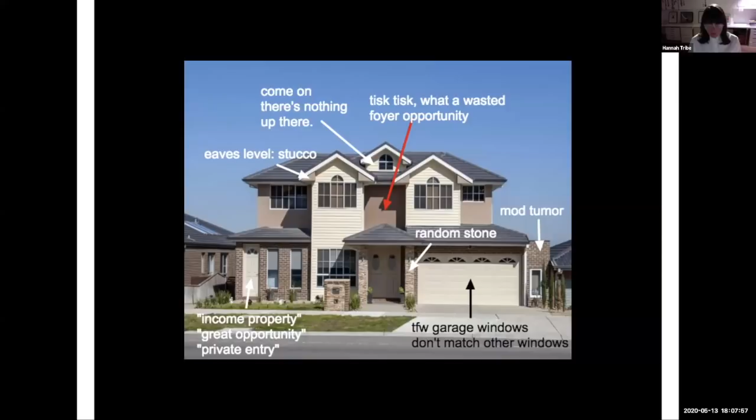My career began in a time with a very different spirit. I started working during the Sydney Olympics, when public spaces had a very different character to how they have now. It was boom time building, optimism, and there was an incredible triumph of public life over the private. We all went out rather than staying at home. And yet today, the end of this moment in my career is marked by the fires, by a raging and galloping climate crisis, and by COVID-19.

We want to help, we all want to do something to support the sick, to support the frontline workers. And the best way that we can do that is to stay at home and actually be domesticated. We've had to domesticate our work lives, we've domesticated school, we've domesticated the gym, we've domesticated our social lives. We're all cooking more, we're not flogging ourselves with additional activities and appointments, and we're able to do a load of washing in the middle of a workday.

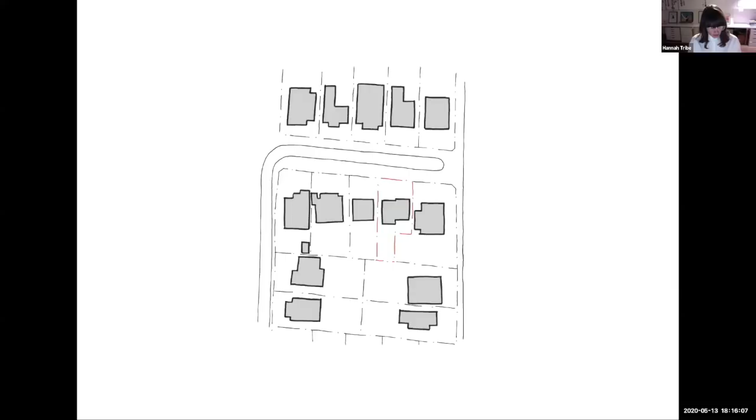The area is really characterized by these small bungalows sitting under a canopy of leaves. In order to keep that, we need to keep the height of the house low and also the footprint of the house small. Here's some shots from around the neighborhood.

This was the house we began with. Here it is on its funny site. We trimmed its back off to reduce its overall footprint and provide canopy for the trees. Here it was at the back of the house. There's where we sliced through the house, and here it is now.

So the back gable's treated as a kind of call and response to the front elevation, where we had the brick sunburst on the front. We've got the cheeky gables on the back. That's my call and response diagram.

Such that from the public domain, the house makes a contribution to this kind of suburban language of brick and tile roofs, but it still is unapologetically contemporary, and it gives you a kind of feeling of suburban uncanny.

So it's a subtle and polite urban design response, this house, not visible from the street elevation. From the rear elevation, it peeks through the other gables.

But what about the cultural response, or why is this interesting domestically? This is a house that actually celebrates our changing cultural values, our relationship with domestic work, our relationship with landscape and our leisure. At the same time, it's a celebration of the modesty, craftsmanship and public domain focus of the past.

Here's the back view. This is this idea about the relationship with the garden, and that garden's all completely overrun with our clients' beautiful homegrown vegetables now.

So the house presents its best face to the street. It's well crafted, it's whimsically detailed, it's expensive to build. But around the back again, here we see the unpoetic side. It houses the domestic work, the meal preparation, the washing.

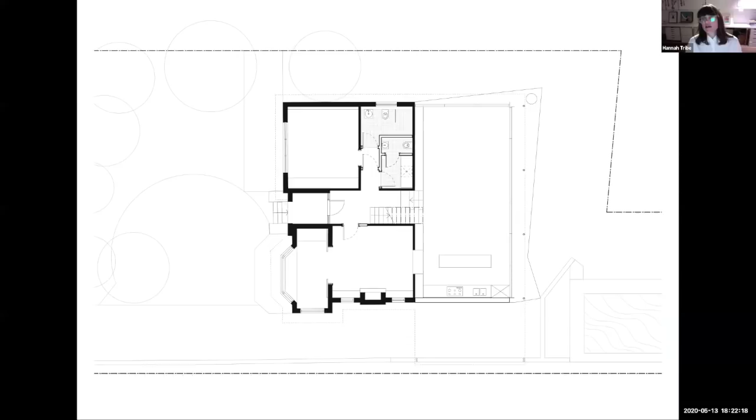So to look at it more architecturally, here are the plans of the house. The front of the house is still very cellular, with this open room at the back. We've got bedrooms wedged into the roof form of the upper floor. There it is in section. And there's our expressive tapestry of brickwork over the top.

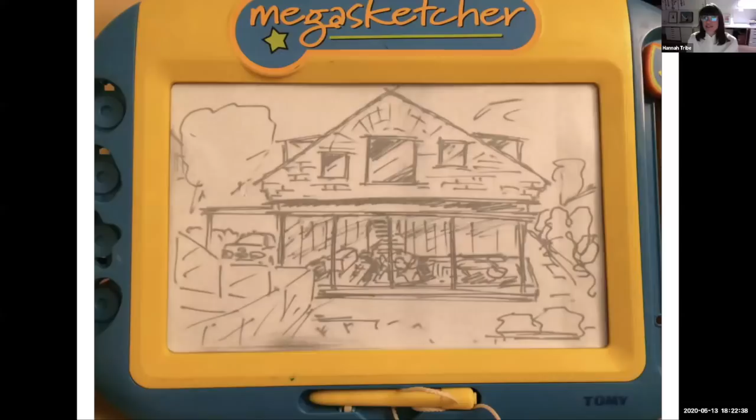But I don't think we captured the real feeling of this house quite as well as our client Trevor did, in his Etch A Sketch rendition that he sent to us after they'd moved in.

The next house is a house in Lindfield, done at about the same time. Again, we've got a leafy North Shore suburban situation, big tree canopy, licheny roofs. Here's the original house. It's quite charming with its long, low lines, a kind of Frank Lloyd Wright lite. The original plan was very simple, a little bit gnarly.

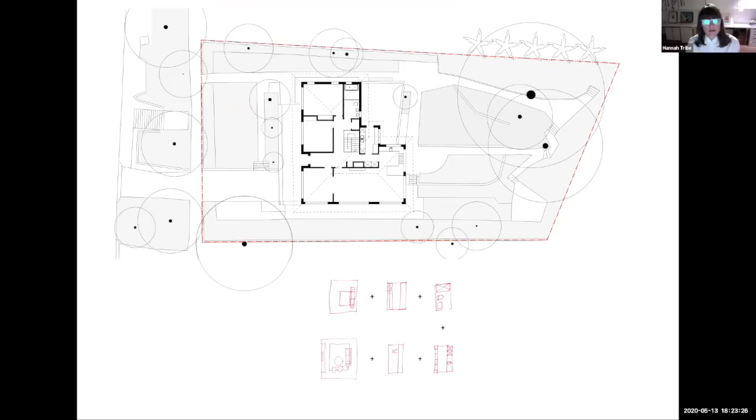The garden, north is to the top left-hand side of your screen. Our brief was to create a new master bed, robe, ensuite, laundry, study, and rumpus. Our project was to do that without demolishing the house and without pushing the roof form up any closer to the tree canopy.

So we started with this original L form and we created this wonky arm on the edge of it, which houses the master bedroom, ensuite and robe. And there it is, its roof form slides in under the eave line of the original house, and its brick and terracotta material reflects the original.

It arcs into the garden, creating both a courtyard and a reflective surface to allow northern sun to bounce off that wall and back into the kitchen. The garden's very private and it feels like it owns that upper level of the garden.

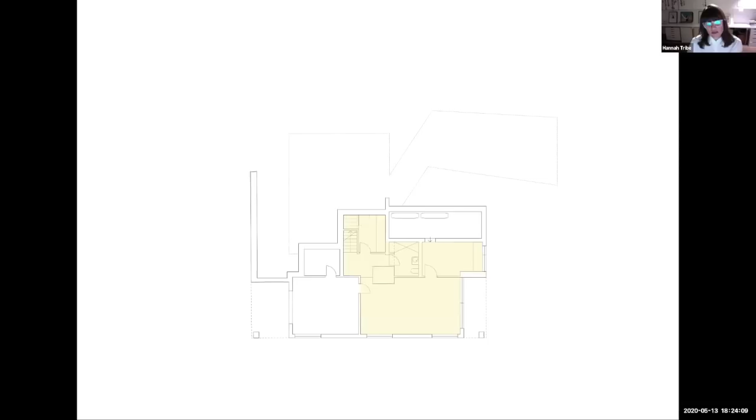On the ground floor, we kind of hollowed out a new study, rumpus room and laundry, exposing the existing herringbone struts under the floor and connecting to the pool level of the garden.

So there it is. We collaborated with Paul Bangay on the garden, creating these two levels and more formal courtyard veranda spaces, kind of blurring the place where old and new meet.

There's the courtyard space, the brick wall in the garden and brick screening. And here's Bangay's garden in stepped terrace walls connecting that lower level to the new wedge of room.

The original house we left largely intact, just staining the cypress pine floorboards black, but leaving the hardwood language and extending that into the new.

A simple addition of a handrail extension and single skin brick wall enclosing that ensuite, using the single skin to express the relationship of light switch to lights.

Again, we made some custom solid brass hardware in this case, including joinery pulls and roseless knobs, and this pivoting and swiveling mirror in front of the brick screen in the ensuite.

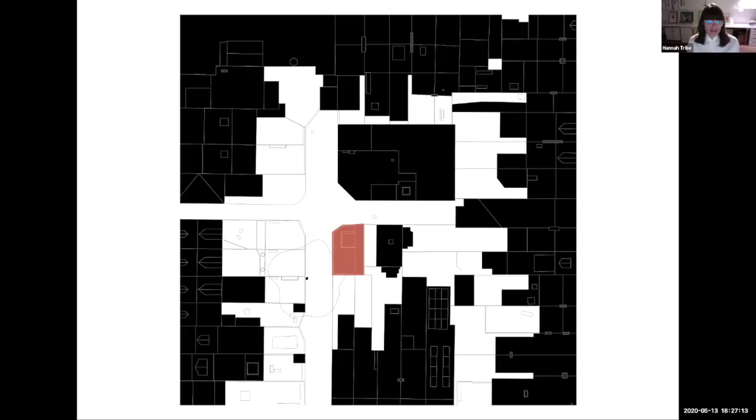There it is before we started. It's a contributory item in a conservation area, but it's really just some charming brickwork and a sweet pediment.

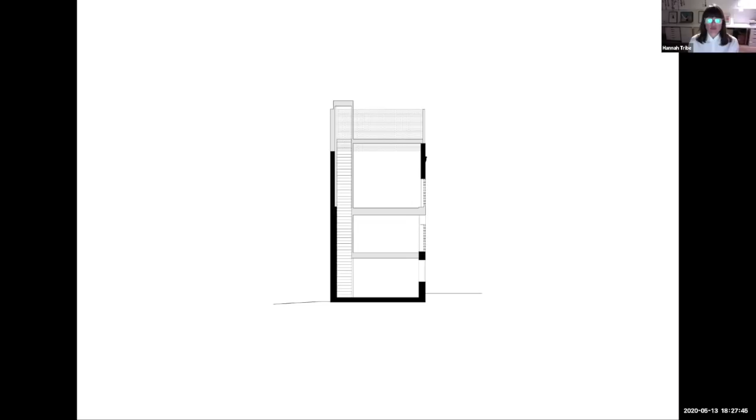It was a two-storey office with a garage on the ground floor, and our brief was to shoehorn in as much space as we possibly could. So we went from 2 storeys to 3 with 2 compressed storeys: garage and room at the base, bedrooms in the middle, and a very tall living space and a roof terrace on top.

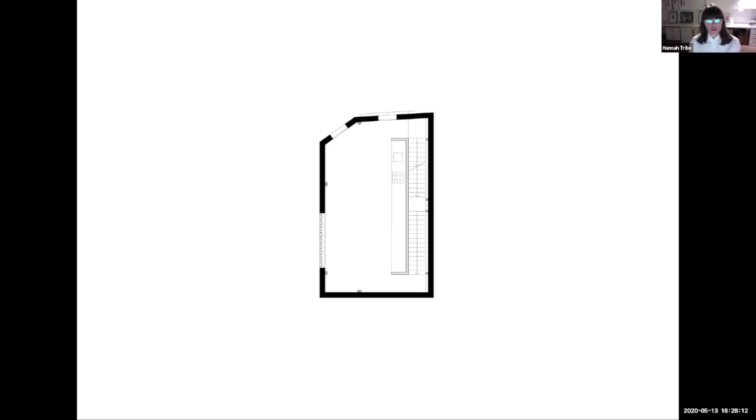So the garage level before looked like that. We put a new stair, which on the right-hand side of that plan, on the east, slices all the way through the building from sky to base. Garage at ground floor with a spare room and bathroom, 2 bedrooms above, kitchen, and returning up that stair to a roof terrace at the top with a pool.

The whole project is a celebration of light: dappled light, refracted light, reflected light, and the pinkish light that's bounced off the existing brick fabric in the neighbourhood.

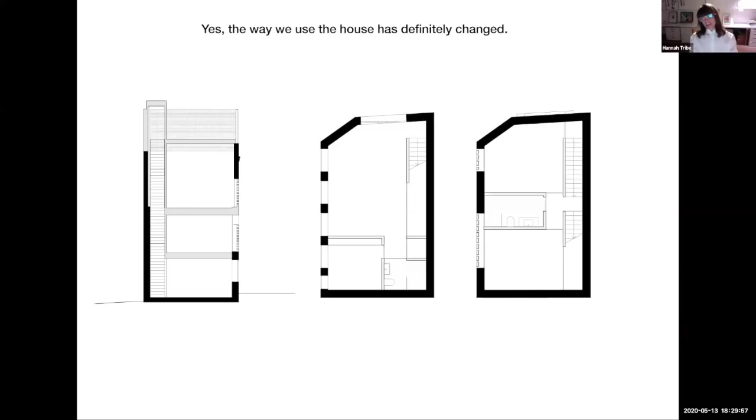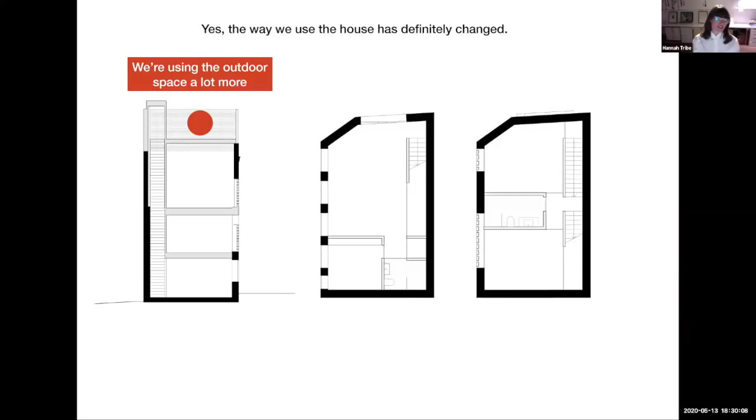So I asked our clients if they'd changed how they live. They're a couple living here, and they said yes, the way we use the house has definitely changed. We're using the outdoor space a lot more, which is, I feel really pleased to think about them sitting on that roof terrace, enjoying the beautiful weather in isolation.

The second and third bedrooms have become dedicated workspaces for Chris and myself. I think that's a huge luxury to be able to set up spaces like that, and I'm really pleased that these guys have that.

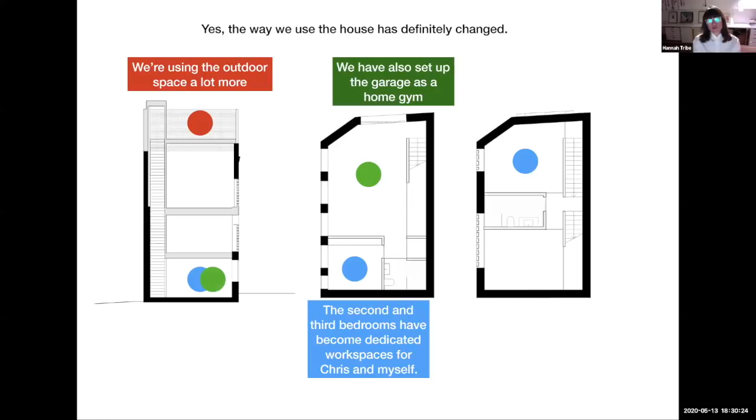We've also set up the garage as a home gym. We've found that having the spaces set up that way has allowed us to separate work and home really well, which I think is fantastic.

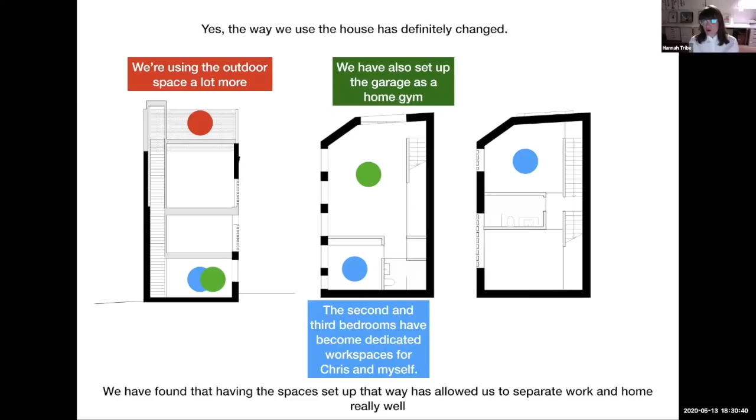And I'm really gratified that in 48 square meters of footprint, they can have 2 home offices, a gym, an outdoor space and a pool, and be functioning really well.

Also, as property prices have increased, desirable areas like this are commanding, or clients are asking for much larger houses on smaller sites. So that sense of this being a real garden suburb is diminishing, and it's turning into a courtyard suburb.

It's a heritage conservation area, but council are quite hysterical about the few non-contributory items. So when we proposed a new house, they said no way, you have to keep that heritage front facade and the front room. So we did that, but we've put a gigantic house on the back of it, a courtyard space, and then a new garage and secondary dwelling.

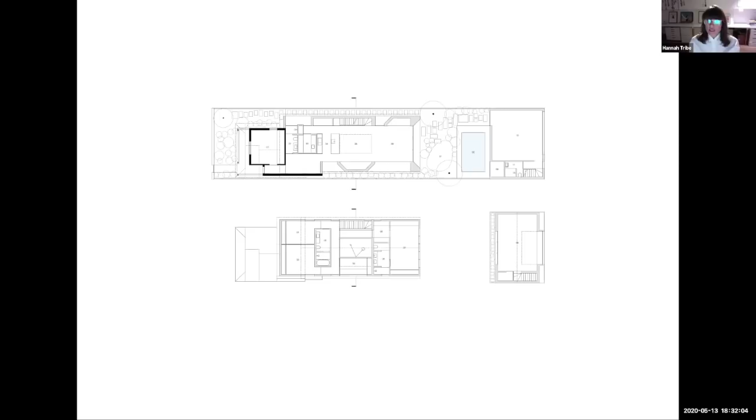So there's this really great densification happening in these areas. Secondary dwellings are quite common, but I think council's endeavours to retain the character of the place by retaining 10 metres of street frontage are probably misdirected.

So instead of doing the second level that looks like it's landed from outer space on top of a little bungalow, we actually did a kind of telescoping series of matching gable ends. So while we don't normally go in for mimicry, we've given it a red hot shot here. And in section, we've got multiple little telescoping shells inside the greater section as well.

The front room is treated in a different colour palette to the rest of the house. The ground floor is made from bricks recycled from the demolition of the project, and there's a kind of richness and density to the programming of the ground floor.

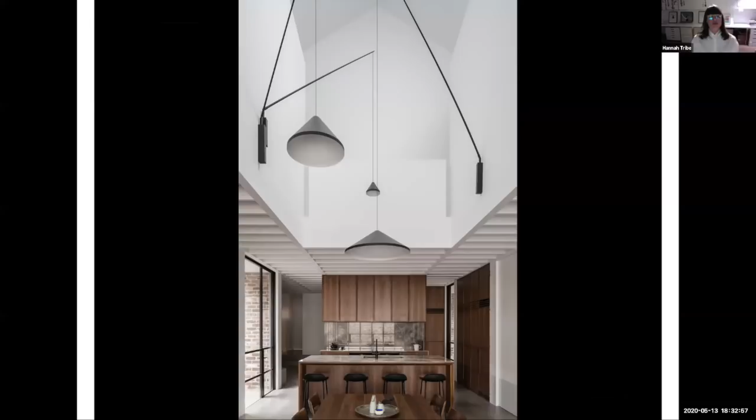Because in these small sites we don't see much of the sky, we treated the volume of the section as a kind of cloudscape, something really muted. This is the kids' study, behind bifold doors in the kitchen area, and there's that serene upper level space with the multiple roof forms, gable-shaped roof forms coming together.

Side boundaries were treated really carefully for privacy in terms of window location. We also used fluted glass and screening for privacy and sun control.

So I asked Sarah, our client, how she was coping. She's a health worker, she's studying, and she's homeschooling two kids.

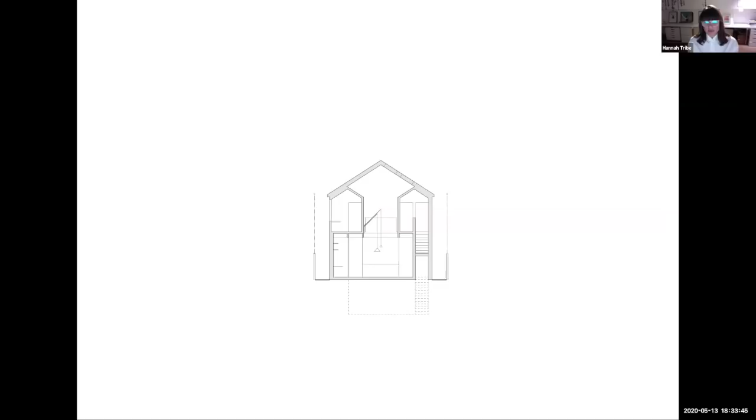Have a look at this section and you'll see, dotted below the main floor, that there's a basement level there. She sent me this video of the basement with the text 'basement, what happens when you can't supervise a child with a penchant for crafts?' And then this second line, which I think a lot of us relaxing in ISO can relate to: 'I've secretly been longing for actual ISO, to be honest,' which gave me pause to reflect.

Moving on to a house in Paddington. This is a terrace house. We're really interested in terrace houses because of that sophisticated repetition of figure and ground.

So the repetition of the figure of the individual terrace house creates a really intriguing ground of urban room, which recalls the work of Agnes Martin for me.

Here's the house, a big grand Victorian terrace. It had a carriageway, shown on the east, the right-hand side, that had a 1980s job on it. The little house was built in the 1980s, so we demolished that and retained the original Victorian.

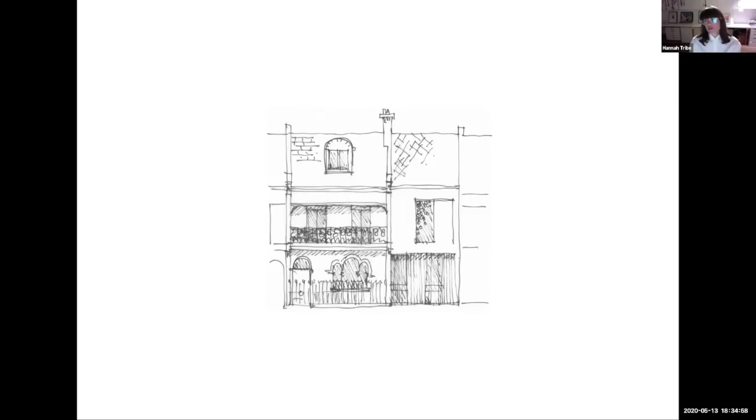Here's a heritage sketch for council, nothing to see here. But the idea was that we continued the street wall to create another figure that creates the ground. The material language is a response to the original, so where we have slate roof in the original, we have zinc tiles here.

Coursed render becomes off-form concrete, and wrought iron becomes a filigree layer of steel for privacy and security.

During this process, about this house, which was in Houses magazine, I was called by a Woollahra Council officer who said, can you enter this in the Woollahra Heritage Awards? And I was like, mate, you never would have approved that. And he said, fair enough, but if you've got something coming up, let me know. And we just did happen to have something coming up, so for this house we had the easiest council process I think we've ever had, which was great.

There it is from the front. The old part of the house remains largely intact, revealing some of its patina of age, with careful insertions that match that idea of texture and layering.

We've got holes through to the new part of the house, through to that side piece, from the dining room to the new kitchen.

So in the new addition is the pantry kitchen, looking out to the existing pool beyond. A new master bedroom with window seat to the north, reading nook, ensuite bathroom that looks out into this beautiful jacaranda tree. We had a lot of fun with the existing and proposed detailing.

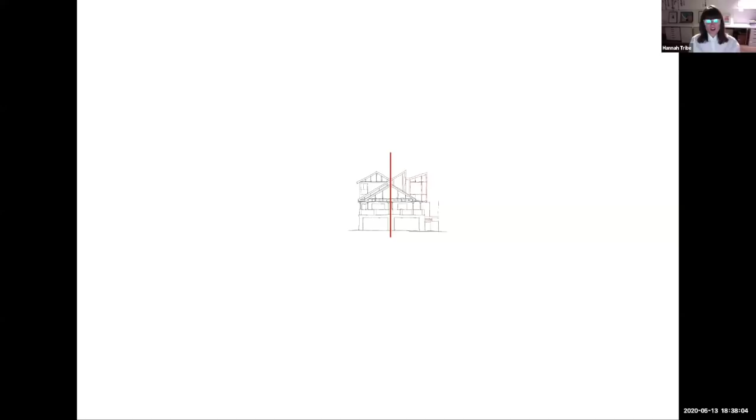Into clerestory windows over, and I think this talks to a really interesting change. Semis are about making your house look bigger, but our clients ask us to demarcate their line of ownership. They want it to look individual. I think our culture and values have really changed since these houses were originally built.

There's the section. It's an inverted section with the cellular bedrooms on the ground floor level and an open plan living space above, with this kind of incredible relationship with the sky and light. So there's our neighbour with their off-the-rack extension, and here we are, very clearly showing that compunction to individualise.

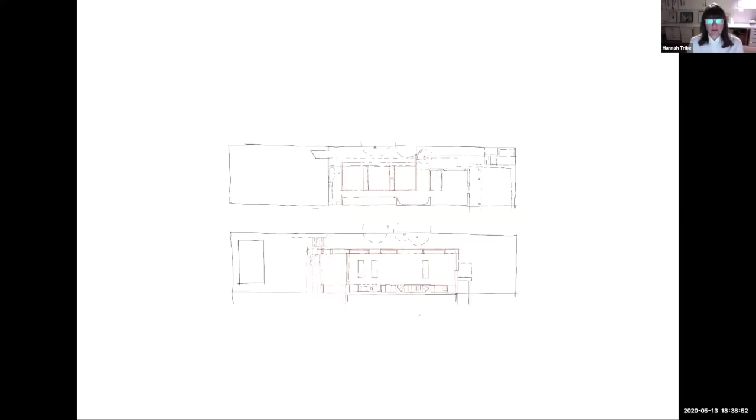In plan, the plan at the top of the screen shows the ground floor bedrooms, and you can't really see them, but stairs up to the pool at the back. There's internal stair leading to the first floor living spaces. Views to the east, sun and tree views to the north, and connection to the garden to the west.

So there's that western garden connection, and you start to see that the first floor is treated as an ambiguous indoor-outdoor space. The light coming through those highlight windows kind of dematerializes the line we've established with the ceiling joists here.

There's the northern highlight window, looking back to the pool. On the left-hand side, all the service zones are wedged against the party wall, which is a way of acoustically isolating two semis. There's the beautiful Robinia framed and filtered views, and looking back down the stairs in that service wall.

So here's the kitchen in its pristine state of photography. Our client sent us some photos of the kids. What does life in COVID look like? Preparing food, eating food, games, learning. And here are the three kids homeschooling themselves.

It's a full carpentry built house, which was an interesting part of the brief. It was built for a builder carpenter. So that idea of extending the language of the gable and the decorative language of the gable was also a response to a construction methodology.

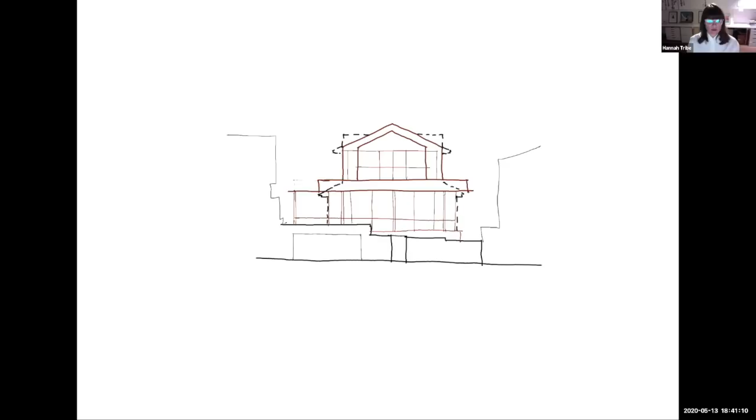So that's what it looks like, almost finished. Bit of chip paint in that photo, but you can really see that we've elevated a piece of garden into the sky and put a little cute house on top.

It's clad in charred timber, charred hardwood, which gets this exquisite quality in the sun, almost like velvet. It has a directionality. So it's used as cladding and as a privacy screen there.

The kitchen sits on the right on the threshold of inside and outside, so that you get this kind of relationship with the view. And the upstairs rooms are smaller with more precisely framed views and a really intimate character in comparison with the open plan of the ground floor.

We had a lot of fun with steel detailing and that contrast between enclosed and open, solid, plain, and open and void. This next house is in Hunters Hill.

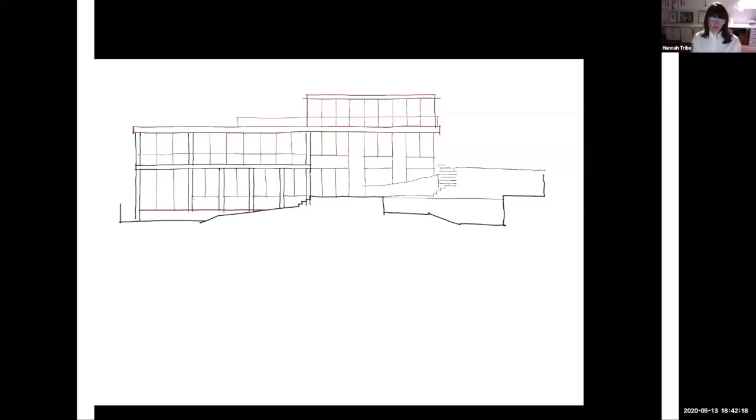In Glebe, we're doing some work to a Victorian heritage house. It's really beautiful and beautifully built brick house. It has this beautiful archway here, and the existing construction of the house is actually glorious. We opened up that corridor and extended it, creating a courtyard to the north.

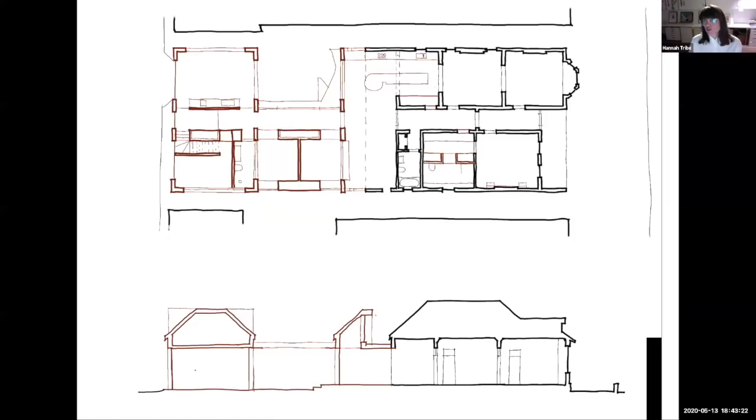This is another densification project with a secondary dwelling to the top and 2 opportunities to work from home. So it's really all about, this kind of predicts a COVID state where we'd have 2 work from home offices, but not much Airbnb rental, unfortunately. The new volume is made by kind of pulling off a version of the old roof so that the elevation in effect remains almost the same.

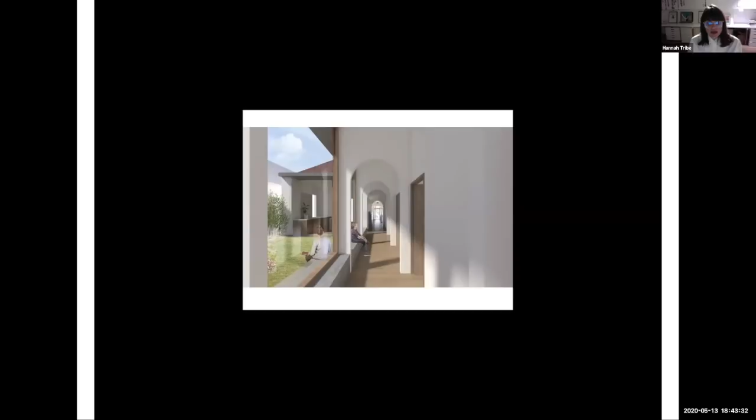And there it is, extending that archway form through the corridor from that front arch, opening up front to back. And that currently looks like that.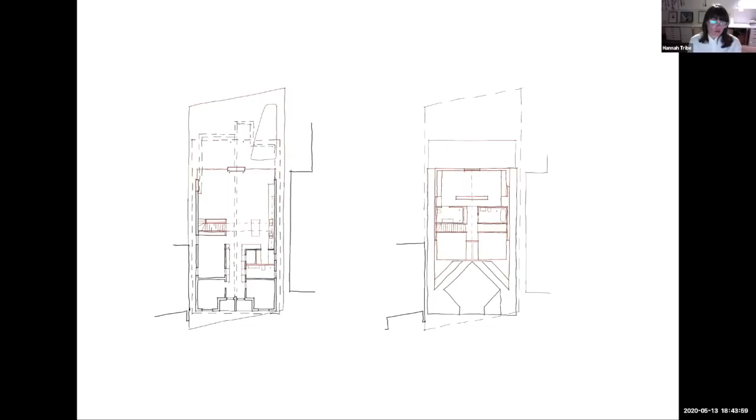This house is the amalgamation of 2 semi-detached dwellings in Paddington. We've honoured the symmetry of the plan in attaching these houses to one another and embedding a new bedroom floor in a sculpted roof space, ending in a gable at the back, so extruding that roof form back. That's what it looks like now. And one day it will be like this.

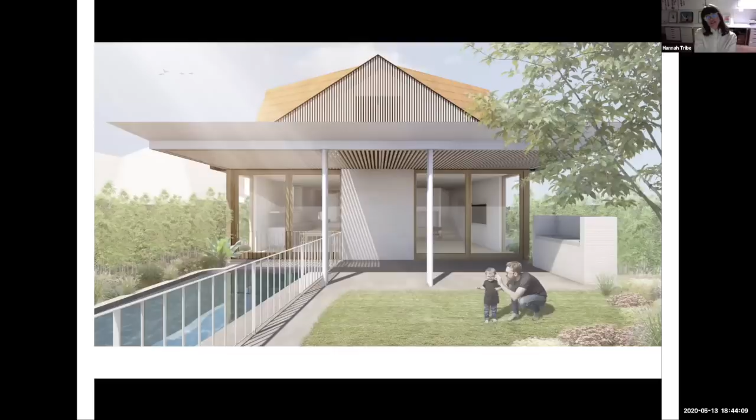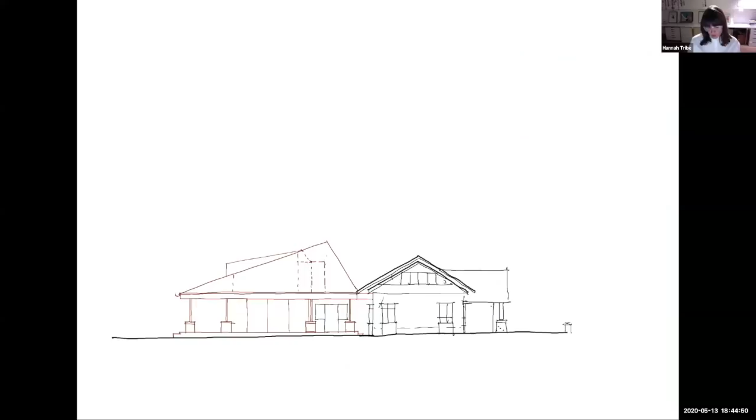We've re-enclosed the back of the house and extended it slightly and added this new roof form with a low dormer and bedrooms embedded on that top floor looking out over the garden and into that eucalypt canopy. And it's got chunky little boots on its skinny legs as well.

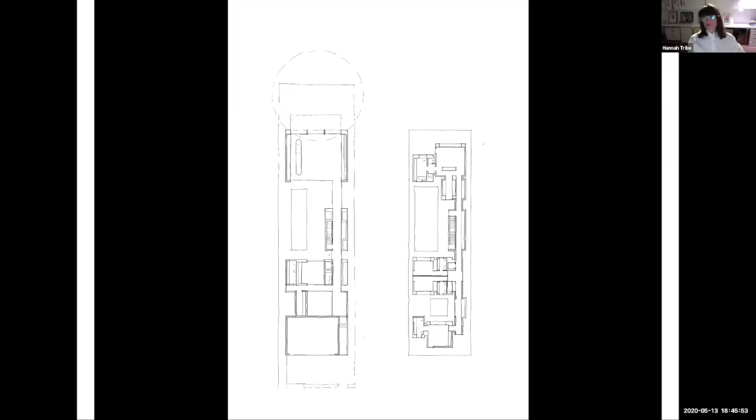Then the first floor is really diminished in scale, like a whole lot of little vernacular beach houses have been dumped on top of a garden floating in the air or something like that. Looks like this from the street, using the modest vernacular of painted brickwork to build an immodest house.

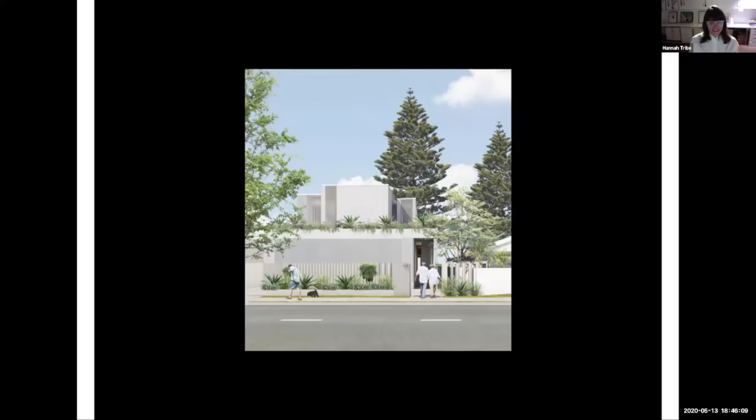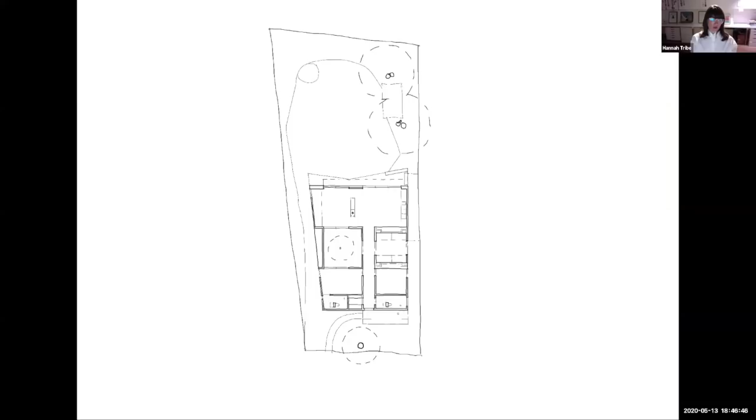To the south of Sydney, this is now in Bundeena, and this is a kind of companion house for that house, but much, much smaller. It's also a timber weatherboard courtyard house, but this one's 150 square meters. So a simple, affordable house built around a courtyard, enjoying a beautiful north-facing garden. A response to the vernacular, a lot of the houses in the area are weatherboard, rather curiously, with terracotta roofs. So we've introduced terracotta in the landscape and weatherboard on the house. And there it is looking back through the courtyard.

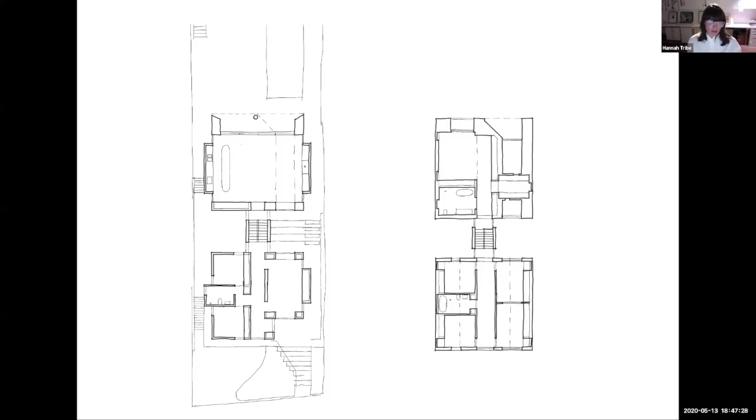In Coogee, on this enormous block, we're building a house for a really busy and active family of 4. It's in 2 pavilions, 2 little house-shaped pavilions. The northern one contains the adults' accommodation upstairs, and the southern one has the children's accommodation. The idea is to take the original bungalow shape and just hitch it up in the air on top of a layer of charred timber work.

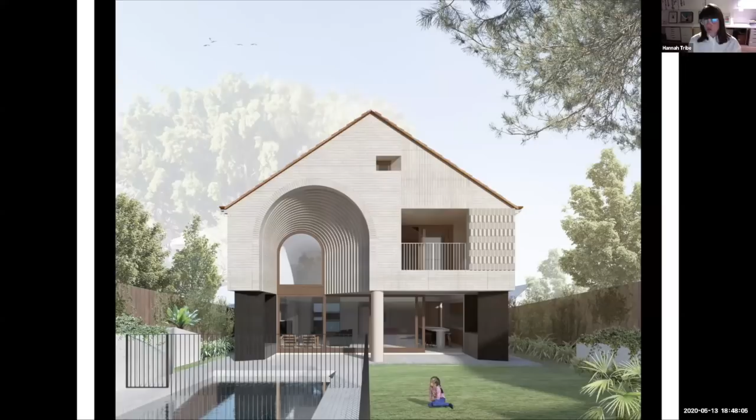And there's our little family vignette, 4 kids, busy family. This is an image our client sent to me. I asked her how homeschool was going, and she said, would they have built this if school was on? I suspect not.

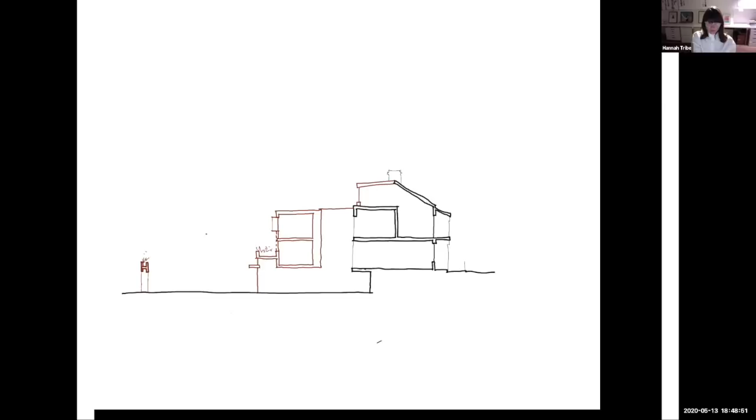And then from large houses, we go to small houses. This is a house for a couple currently living in New York with 2 kids, in an apartment, and they can't wait to get home to the luxury of this enormous house. It's a terrace house, and we looked for the opportunity to create space through this section. Using the step down in the topography to squeeze 3 floors of accommodation where there was previously only 1. We're going to demolish the existing brickwork to the rear and reconfigure it, concealing that section in an elevation that looks like 2 stories.

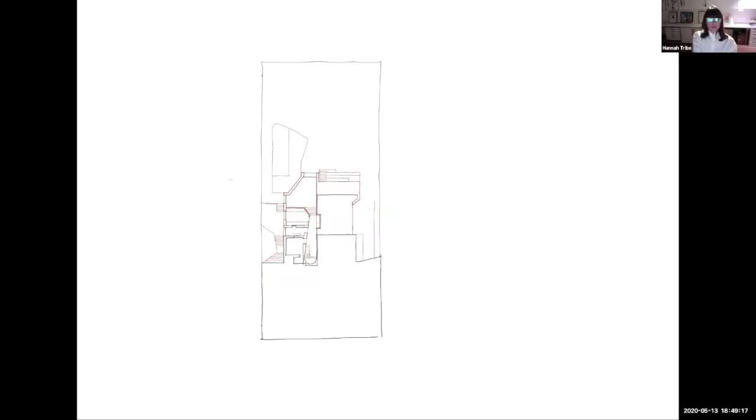Then in Bellevue Hill, we've got this beautiful large house. It's a heritage item, a really special house on a gorgeous site. We're putting in a new basement level and pool, which holds up an extension of the existing sleep out. There was a sleep out built with the original house to the east, and we're bending that language around to the north to create a new kitchen and living area, and a great big terraced bleacher basement piece connecting to the garden. On the top level, we're extending the language of the roof form to make a new master bedroom, a kind of palatial dressing room, and a little nook adjunct to one of the bedrooms that's a slumber party and study nook.

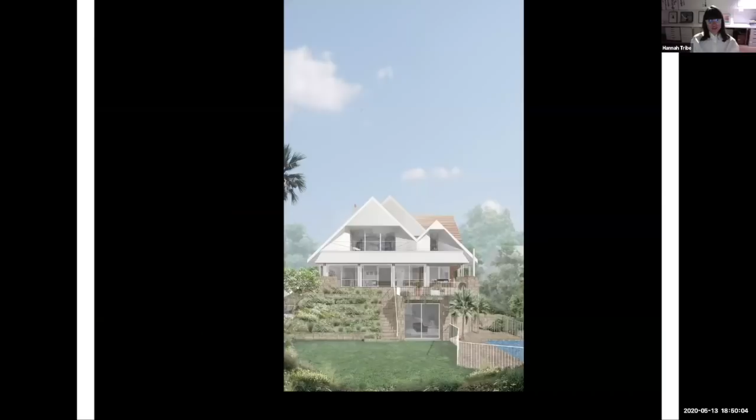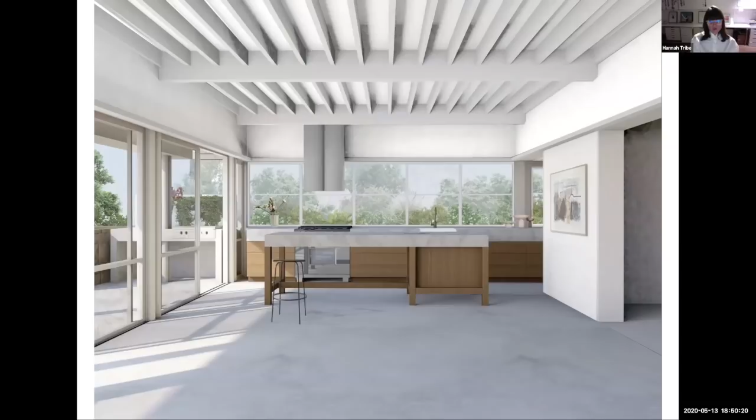This is the front of the house. She's a kind of stately and dumpy old dame in need of a makeover. I find something so charming about this rear elevation, but we're going to do this to it. So really reinforcing that idea of enormous roof, recessive middle and strong occupied base. Here's the extended sleep out rooms, and this becomes a cooking space that's really attached to garden and outside, in a way that the original arts and crafts houses weren't. They were very inward looking.

Client Glenn sent me a portrait of his homemade sourdough. He's a very busy professional man, and he's using his house in a way he didn't think he would.

Then we go back across the bridge to Mosman. This is the second last project I'll show. This is a house with north to the rear of the site and a view to the south and to the east. It's in a row of bungalows, sweet bungalows in gardens, that have all been... well, I guess they did this to it. So it would have been a brick and tile house, and it got this done. It's got a really strong street wall and some interesting form making and material language going on.

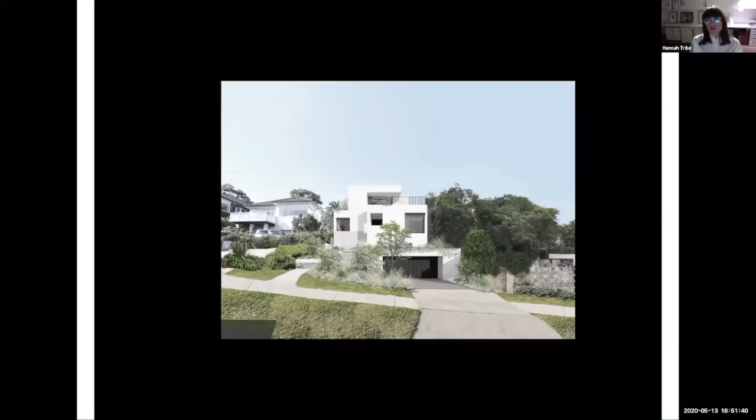Like the previous Mosman one, there are a few critical points in space we have to keep, but at the same time, we'll rebuild in brick without blocking anybody's view. So it's vastly enlarged, but it's still an enabling project. We push the garage back under the house and reinstate garden and wall-less garden to the front of the house.

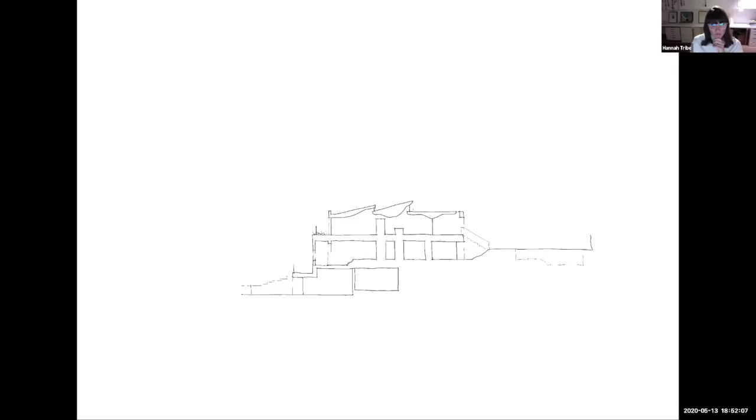So there it is. Our clients don't like warm colours, which has been a real struggle for our team, which is quite interesting to know that we have a real bias towards warm colours. So we've been working within this really cool idiom, referring to Morandi's exquisite paintings and colour palettes and compositions, working with this very cool restrained palette. So there are the highlight windows facing north and looking back to the south.

And this is the last project I'll show. This is a house in Bronte. It has north and views in the same direction, but in this case, the garden's to the south of the site.

There it is, elevated above the street. The street to the south is actually 4 stories above the ground level of this house, so there's a huge site differential.

Our strategy in plan is to push all the servant spaces of the house to the perimeter and clear out a bit of connective tissue that goes from view to garden seamlessly. So we've got these heavy brick sides and a completely clear central room on the ground floor, and moving upstairs there's a void and some bedrooms.

Pool to the back. The domestic ritual of our client is to come home, swim at Bronte, come home and grab a beer from the barbecue fridge and sit in the pool before engaging with the family. So a lot of work's gone into supporting that ritual.

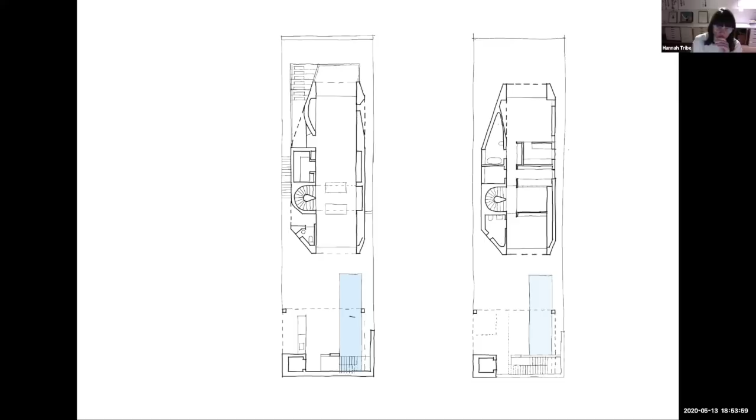I think thinking about the house and the domestic makes me feel grateful to have had this time with my family, certainly to have had an opportunity to ask people to reflect on their relationship with their family. I think to live in a country with good healthcare and dedicated healthcare workers makes me feel grateful for the homes we've had the privilege to design, and also to be housed ourselves.

I think we've been talking about the housing of the privileged tonight, but I think it behoves all architects to start to think about the housing of the underprivileged if we do go into a deep recession.

So there's been a lot of chat about changing our domestic ways in the future. I hope it's not at the expense of public or communal spaces of our cities, but I am really excited to see what the future of flexible work means and what that means for the domestic.